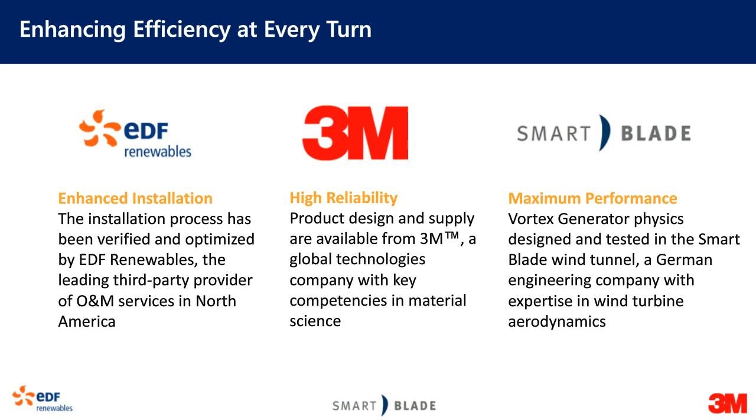EDF Renewables, we provide highly trained blade technicians to install VGs with an optimized installation procedure tailored per blade design. At EDF Renewables, safety is our first priority. We utilize SafeStart to instill a culture where safety is always our first thought. We currently have 10 gigawatts of renewable assets under contract, with all the major OEMs being represented in our fleet. We have a workforce of over 450 technicians to maintain our customers' assets and keep them running at peak performance.

What is AEP? AEP is the annual energy production of our generators. A generator's output can vary based on a variety of factors, including low wind resources, high curtailments, or equipment condition. Blade leading edge erosion or uncalibrated pitch systems can lead to high losses over time.

So how can we ensure that we maximize the turbine's AEP? Well, there's a variety of ways to do this. Pitch and yaw optimization, ensuring that the turbine's pitch and yaw alignments are properly calibrated to maximize wind capture.

Our blade maintenance, blade inspections and repair, ensuring that you understand the condition of the blades to ensure they are free of defects that could lead to performance losses. Major component hardware upgrades. This is something a lot of people are doing right now, repowering their turbines with a higher rated drivetrain or power converter.

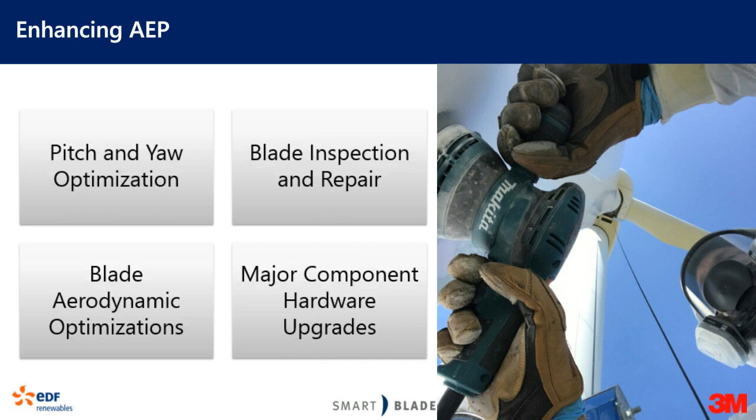Charles, thank you very much for that introduction and bringing all the different parties together. So I want to take a few minutes to give an overview about the vortex generator, what it is, how does it work, and what value does it bring, before I turn it over to you on the installation and understanding more from the project here as well.

But vortex generator, so VG, is known as and referred to as VGs moving forward. It's an aerodynamic performance improvement device. We know overall vortex generators have been in the industry for a very long time. It has been there to redirect the flow and delay any separation, thus reducing the aerodynamic stall.

Vortex generators have been used even before wind space in the aerospace industry and have a very long history. But when it comes to the blade, there have been a lot of challenges. So we want to understand further how our solution has resolved some of the major problems that you've seen in the industry with vortex generators.

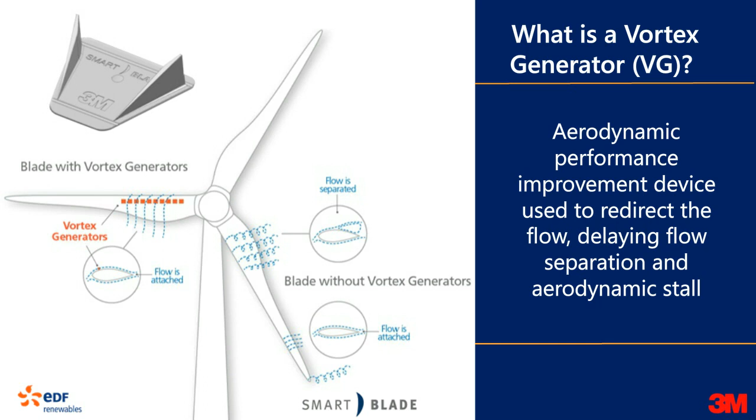So the key idea behind the vortex generators is we have aerodynamic deficiencies at the root of a wind blade. You are working with a structure that is actually a cylinder, which is not very aerodynamically efficient. So by addressing that deficiency and installing vortex generators at the right place with the right information, you would be able to generate a lot more AEP, the annual energy production of a wind turbine.

We as an industry in wind are always competing with other sources of power, and every ounce of energy that we can actually harness more from the wind turbines would be of great benefit to our customers and also for the industry. From our experience and knowledge, we have now installed more than 2,000 turbines, and on average you can get up to 2.5% to 3% increase in power by installing vortex generators at the key and the right locations.

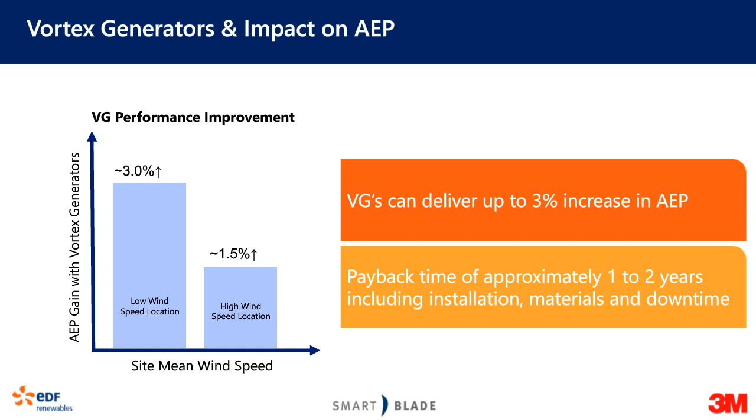Now, one of the key challenges in the industry is you are trying to attach a plastic or a metal or any kind of vortex generator to a big, large composite part which continuously has flex. So we are trying to bond dissimilar materials that go through very severe weathering conditions and have a very long life cycle.

So what happens is in that case, you need a solution that is going to bond really well. Plus, from an aerodynamic standpoint, once you correct the aerodynamic deficiency, certainly you will increase the power output, but we want this vortex generator to stay on the blade for a significant amount of time so that you're not only making it a break-even solution, you also enhance the profit coming out of the increased power generated by a vortex generator.

So the problem here that we're trying to address is we want a solution that can help bond, but we also want a solution that not only bonds well, it has to last for multiple years so that you don't have to go back and fix and repair any of these vortex generators. Traditionally, the industry has been bonding with different kinds of adhesive, and we as 3M have a lot of different experience in bonding and adhesive.

So one of the challenges that we understood from bonding vortex generators with adhesives is that we have a flexible blade that moves significantly, and you have a thermoplastic or metal, any kind of surface that you're trying to bond, that will expand at different rates.

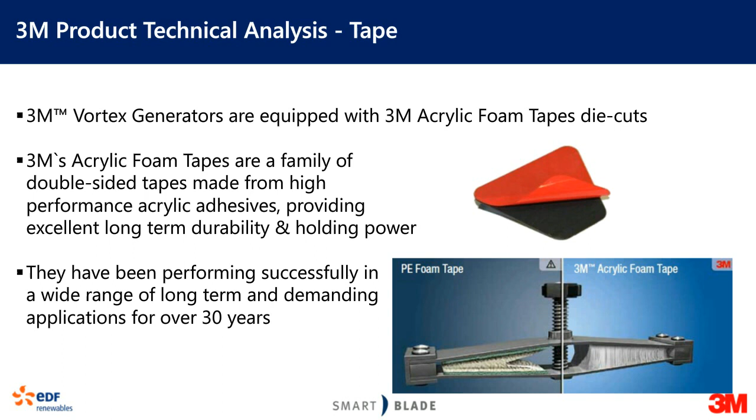Once you actually know how to bond the solution, in the field it is really important to understand how and where to install the vortex generators. That's one of the key aspects.

Many times, vortex generators are designed from a blade design compared in a computer CAD model. It can be very accurate from a modeling standpoint, but is it realistic for a blade that is in the field and has been operating? As we know, blade manufacturing from a CAD design to a final part, there are a lot of variations that can happen. So partnering with SmartBlade and EDF, there's a new technology we were able to develop.

It's called Smart Visualization. Smart Visualization enables us to visualize the blade and the airflow around the blade at the root area to understand and capture the key deficiencies that are happening. It helps us look at the airflow and understand when and where the vortex generators need to be installed.

With the help of multiple different cameras and very high-end data analysis, we can look at the flow and understand where the separations are. Once we understand where the separations are, we can go ahead and install the vortex generator at the right places to make sure it increases the overall efficiency of the blade without affecting performance.

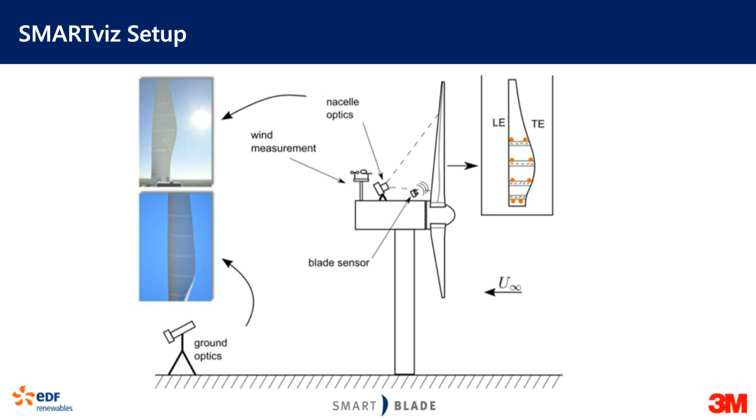That's actually a very good visual proof of that. You can see here a picture where we have done the flow visualization. You can see the blade is in operation, and we go ahead and install many flow tufts on the root end of the blade at various different locations. We run the turbine for a certain period to understand how the airflow is.

As you can see, this turbine is in operation. At the leading edge, you can see where all the flow tufts are perpendicular to the blade length, showing that the wind has attached to the surface and is flowing through the leading edge, causing the flow tufts to be perpendicular to the blade direction, or parallel to the wind direction. But you can see something happening after the first few flow tufts. As we move forward into the chord of the blade, the flow tufts are now parallel to the blade direction and perpendicular to the wind direction, which is odd, right?

So essentially what we're seeing is the wind coming and attacking the leading edge. The flow continues along the leading edge, but at a certain point you see flow separation. So essentially that surface energy is not being used, and we actually have a deficiency.

By looking at this and getting feedback in real time with the help of multiple cameras, and inputting that feedback into a very detailed analytical system, we can understand where that stall or flow separation is, which helps us install the vortex generator efficiently at the right location.

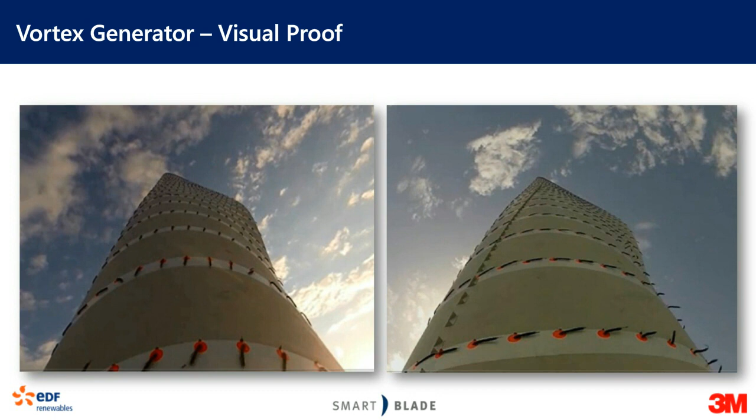Santosh, thank you very much. Last year, we worked with one of our customers to identify a site where we could perform a pilot to verify the AEP increase of the vortex generators.

With our customer, we looked at their fleet and determined they had a high population of GE turbines. After looking at their individual sites, we found Bobcat, a very low turbulent site with very flat terrain. They had a consistent prevailing wind out of the southeast, and a lot of turbines on the southeast side of the park with no turbines in front causing low turbulence, low wake.

The site also has access to a historian with 1-second data, so we knew we would have very reliable data to analyze, which brings down the uncertainty factor in our analysis.

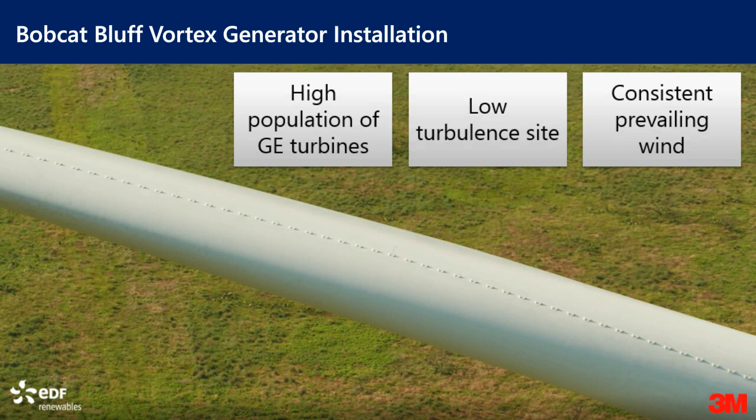So last summer, we performed the installation at the Bobcat Wind Farm on 6 turbines. As we've said before, each installation is blade specific, so utilizing the SMARTviz, every blade is mapped and modeled so they all have the ideal VG line to maximize the AEP increase.

Off of that SMARTviz, we tailor a blade-specific installation manual, and we have blade-dependent installation templates that we use to ensure a precise, robust, repeatable installation every time. We have very minimal downtime - about 8 to 10 hours one day to perform an installation on a turbine.

We currently have the ability to install VGs on 20-plus turbine models, and this can grow if a customer wants to model a turbine we haven't modeled yet. We can do a SMARTviz and very quickly determine what the VG line is, and go out and perform installations on that turbine. Now I'll pass it over to Oliver to take us through the results from Bobcat.

Before we go on with a detailed look at the Bobcat data, I would like to introduce you to our general trial process. Turbine trials are a relatively important part of the whole process since they allow us to evaluate the value of our vortex generator solution in form of AEP numbers that we can expect in real life. Therefore we have established a well-defined trial process that allows us to gain results with highest certainty. Looking at this, it consists basically of 4 steps.

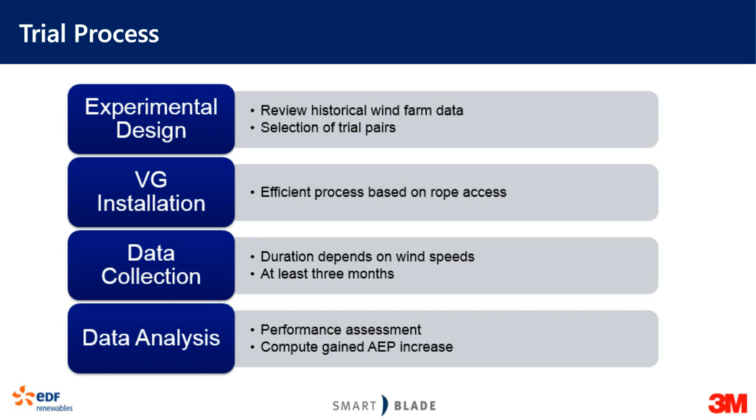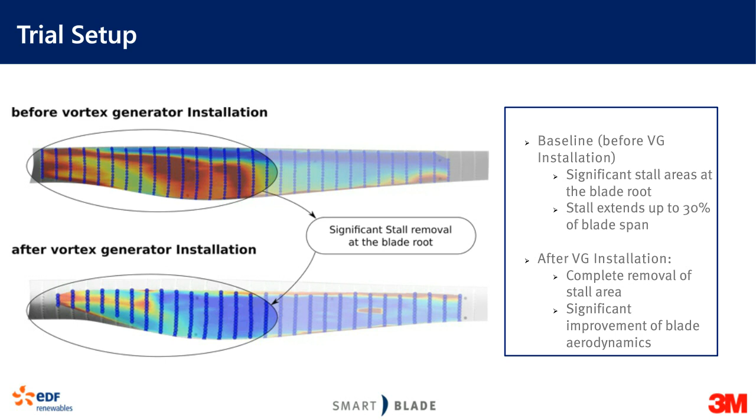For our trials, we use a relatively straightforward method, which we used in a vast amount of trials before, and which has established quite robust results for us. Here we always use a test turbine and a control turbine, whereas the control turbine is a turbine that is running as a reference and remains unmodified throughout the entire trial period. The test turbine is a turbine that we selected and paired with the control turbine, and the test turbine will have VGs installed after a certain period.

In order to account for initial differences in the AEP of both turbines, we do a power output comparison for the historical period, where both turbines are completely unmodified. The same power output comparison we do for the post-install period, where we now have the test turbine with vortex generators installed. The overall difference between the historical period and the post-period will give us the final AEP gain that we achieved through the installation of vortex generators. This method we used in a vast amount of trials, and had also been successfully reviewed by DNV GL, and the method was also successfully validated against rather scientific methods such as the TAMU method, which is a multidimensional power curve method.

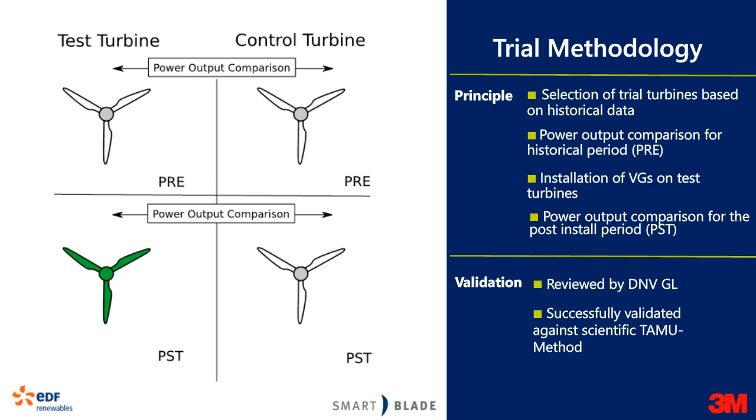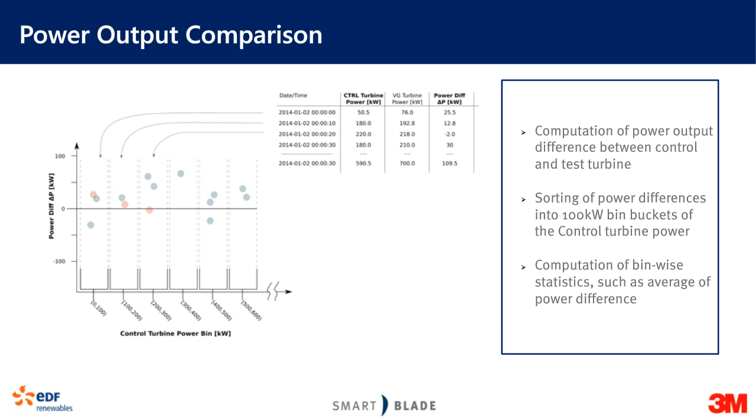The Bobcat wind farm is a relatively low wind speed site with an annual mean wind speed of 6.6 meters per second, and we have a pretty pronounced prevailing wind sector in the south-southeast direction. Therefore, we identified quite a lot of test turbines in the southern rim of the wind farm because we can expect clean inflow conditions from these wind directions.

For the complete trial, we had a 12-month historical data period available, and we collected 6 months of data post-installation.

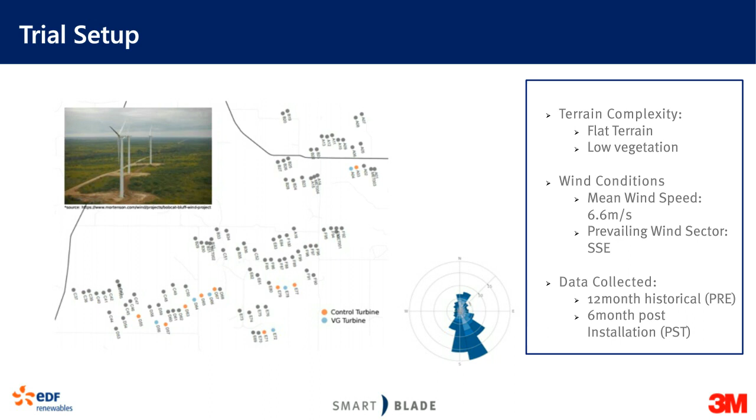In order to align both distributions, we can use distribution sampling. Here we define the post-install wind speed distribution as a target distribution, and we sample the historical data set such that we meet this target distribution. This way we can ensure that all wind speeds are covered for both periods in the same way.

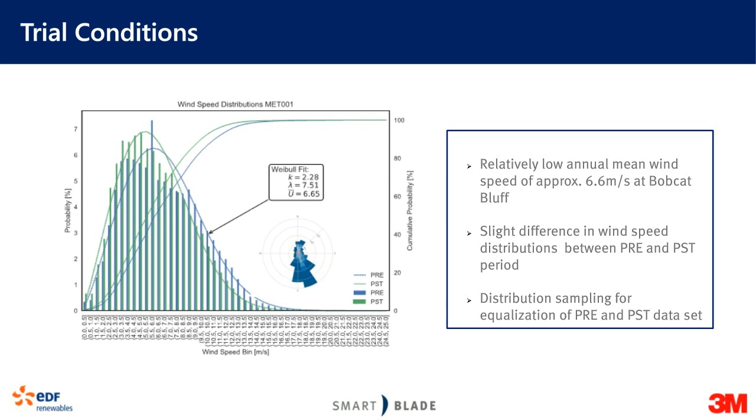One of the most important steps before going to the power output comparison between both turbines is proper dataset cleaning. The main objective is to assure that both the test turbine and control turbine are running in normal operational states. Therefore, we remove start-stop scenarios, fault events, and also third-party curtailment events.

Another objective of the dataset cleaning is to remove inconsistent and corrupted parts of the data set. For example, as you see on the bottom image here in a power time series plot, we might deal with large data gaps that are filled with artificial interpolated values, and these values do not contribute well to the whole analysis. On the top graph here, you can see the result of the proper dataset cleaning.

You can see colored in red all the data points that are off normal operation and that are corrupted, and you can see in blue the clean data set. As you can see, the clean data set shows a pretty well-shaped power curve scatter plot.

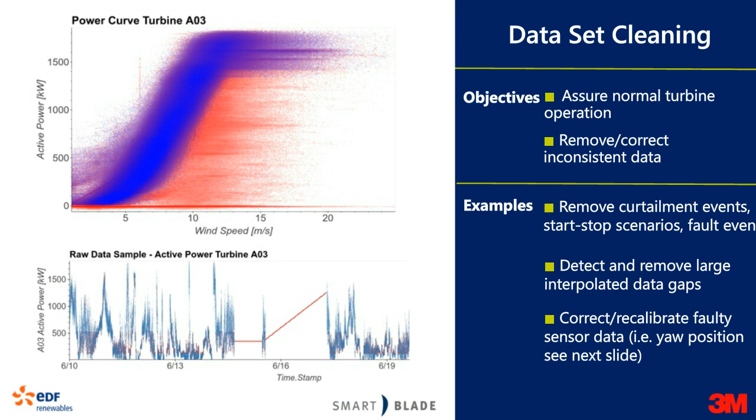One thing we observed when we had a look at the Bobcat data was that we had some problems with the yaw position signal. When we look at the bottom left graph here, we see a comparison of yaw positions between the test turbine and the control turbine. On the x-axis, you see the yaw position of the control turbine, and on the y-axis, you see the yaw position of the test turbine.

What you should see, if everything is fine, is only one band here in the middle of the graph, but obviously in this case we see also secondary bands, which shows us that both turbines are not really aligned in terms of yaw position. Since both turbines are neighboring turbines, this behavior is not expected, so we had to deal with corrupted yaw position calibrations here.

In order to tackle this problem, we used some nearby met mast data and compared the yaw positions of our turbines with the met mast data. Looking at the statistics on the top of the graph, you can see in blue the turbine E72 - the difference of the yaw position to the met mast data - and you can see the blue curve here is close to 0 all the time. This means that turbine E72 is well aligned and that the yaw position signal is correct for this turbine.

For turbine E71 instead, you see that from July to October, you have a difference to the met mast wind direction of -100 degrees, and in the later period, you see that this difference is only -30 degrees.

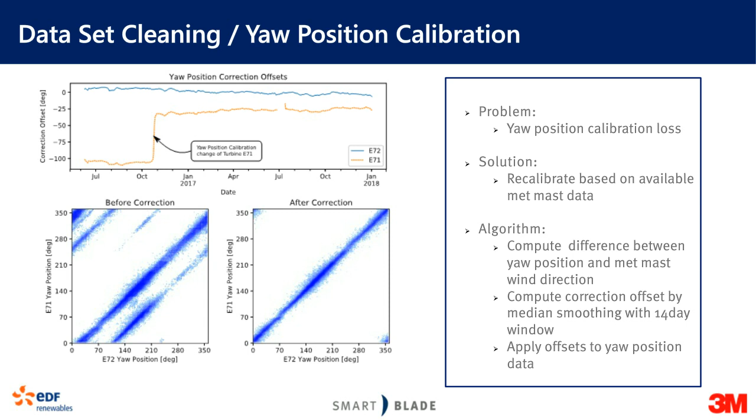Another issue we observed during the review of the entire trial data set was that we have some further modifications on some turbines done. This violates a bit the fundamental requirement of the overall method, which says that the only modification of the test turbine, in this case, should be the installation of vortex generators.

To see what's going on here, let's look at the left graph on the slide. Here we see the active power versus the generator speed for a sample turbine. You can see the linear region, which is the variable speed regime, and two discrete bands, which distinguish maximum RPM regimes. These different bands are caused by the wind boost package installed on the GE platform in Bobcat. Whenever wind boost is switched off, you have the lower maximum RPM, and whenever wind boost is switched on, you have a higher maximum RPM.

Another problem we see on this graph is that if we zoom into the speed-up curve, we observe two different bands. After further investigation, we could connect this different speed-up behavior directly to a pitch adjustment on some turbines. Since this pitch adjustment causes a significant impact on the speed-up curve of the rotor, we can also expect it has a significant impact on the power output of a turbine. If we wouldn't clean up the data set, we wouldn't be able to distinguish the effect of our vortex generators from the effect this pitch adjustment might have on the active power output. Therefore, we had to remove quite a few test pairs that we initially wanted to investigate.

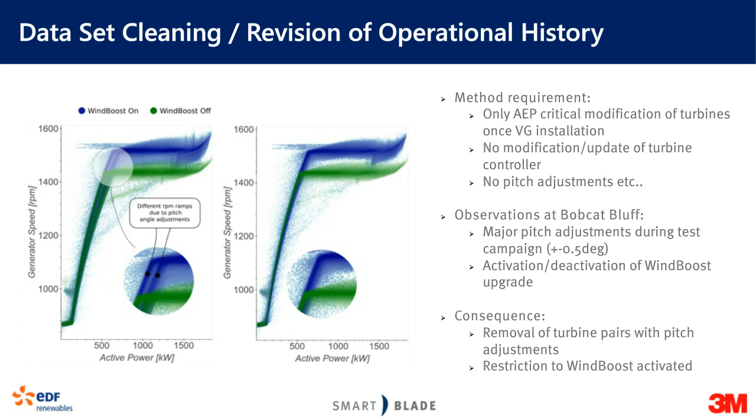Having done the complete data set cleaning, the next step we did is proper wind sectoring. The main objective of wind sectoring is to assure that both turbines, the test turbine and the control turbine, see similar inflow conditions so we are able to make a fair power output comparison. Therefore, we had to exclude wakes, obstacles, and everything which disturbs our prevailing wind vector.

Looking at the graph on the left, you can see the wind speed ratio, which is the nacelle anemometer wind speed of the test turbine divided by the nacelle anemometer wind speed of the control turbine. This wind speed ratio is binned according to discrete wind direction bin buckets, using the yaw position of the control turbine. For each bin, we show the statistics in form of box plots. As you can see, in the eastern and western wind sectors we have heavy wake conditions, so the wind speed ratio is far from unity, and we also have a large data spread.

Looking at our prevailing wind, we have pretty clean conditions here. We have a wind speed ratio of unity and a relatively low spread, and we don't see any wind direction dependence. So these are optimal conditions for a fair power output comparison.

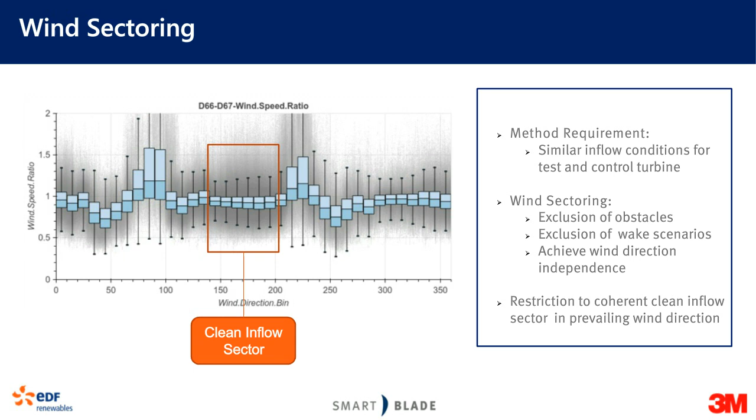After the dataset cleaning and proper choice of a clean inflow sector, we can do the power output comparison for the historical and post-install period and do a general comparison between both periods.

On this slide, you can see the resulting graph. On the x-axis is the active power bin bucket of the control turbines, and on the y-axis is the power increase caused by our vortex generator installation.

Looking at the power boost across different operational regimes, we observe that for the low power regime below 700 kilowatts, there's no significant impact on power output from our vortex generators. This regime corresponds well with the variable speed regime of the turbines.

As soon as the variable speed regime is left, we see a significant power boost starting at about 800 kilowatts and reaching a maximum peak of approximately 80 kilowatts at approximately 1,400 kilowatts of the turbine.

When we reach the rated region of the wind turbine operation, we can see that this effect disappears and goes to zero, which is expected behavior since the pitch controller is limiting our power output.

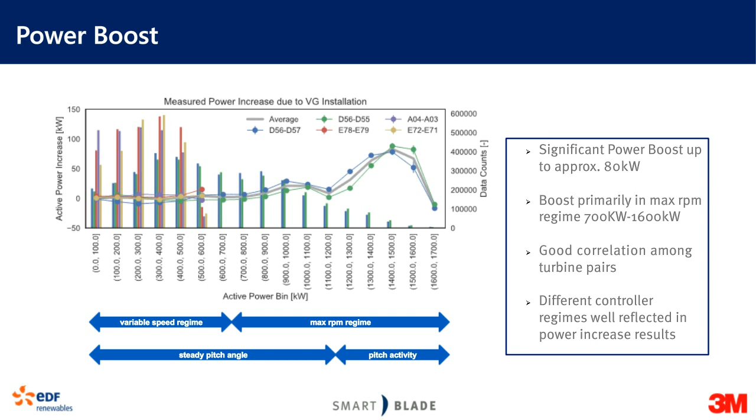In order to transfer this power output to AEP gain, we just need to apply our power distribution at the site. On this graph, you can see in the background bars the power distribution at the Bobcat wind farm. Combining this power distribution with the power increase we measured, we can get the AEP increase for this specific case.

With the same method, we can also use power distributions from other sites, derived either by wind speed distributions or directly from historical power data of a wind farm, and we can transfer the results from Bobcat to other wind farms.

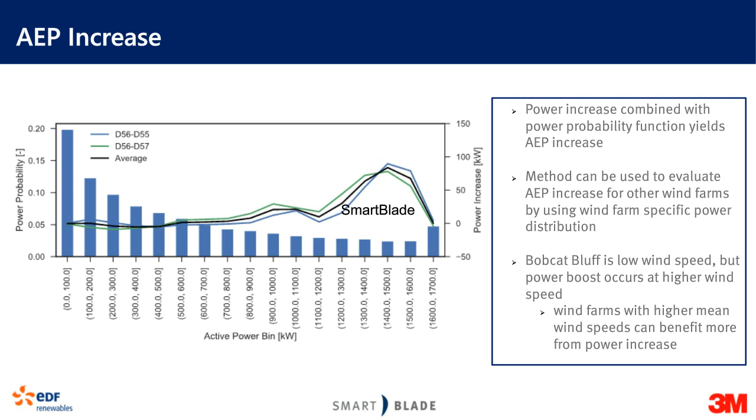If we do the final step, we can see the AEP increase for each individual test pair at Bobcat. For the first pair, we see a 1.4% AEP increase, and for the second pair, we see a 1.8% increase.

As an overall average for the Bobcat case, we can see a significant AEP increase of 1.6%.

The uncertainty of this case was computed based on a bootstrapping method, and we can state that the 95% confidence levels span an uncertainty range of 0.1%.

The significant AEP increase of 1.6% fits pretty well into the results we gained through a vast amount of other trials. Now I hand it over to Charles for a conclusion to this webinar.

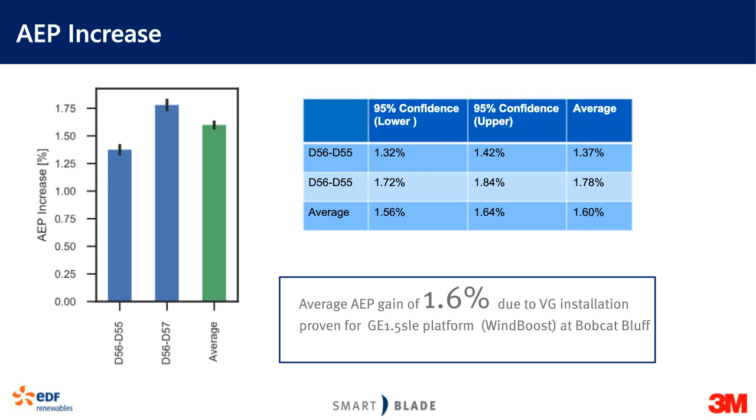Now let's take some questions from the audience. First up, what is the variability that an owner could expect if they installed vortex generators on a different site with the same turbine model?

The general range that we see when we look at the Bobcat trial results is 1.5 to 2%, although Bobcat is on the lower end of the range because it's a low wind speed site. For sites with a higher annual mean wind speed, we would expect something like 1.8 to 1.9%. We can also use the Bobcat results to directly compute expected gains at a specific site if we get the wind speed distribution.

Makes sense, thank you. How would a complex site with many elevation changes affect a pilot?

Pilots at really complex sites are feasible, and we have done quite a few trials on sites with a lot of hills, mountains, and different flow effects. What we observed is that these trials are also feasible, but we see a higher uncertainty in this case. So for trials with complex terrain, we should check for a larger sample size in order to have a robust result, although the uncertainty is slightly increased.